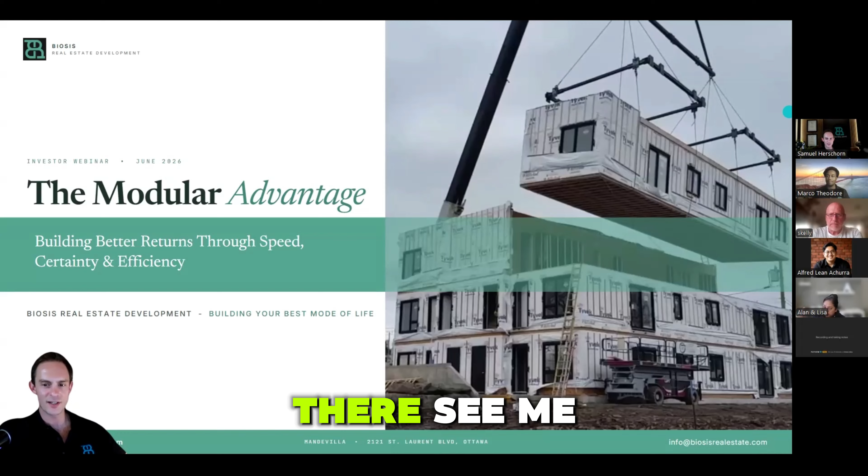Okay, well thanks everybody for joining once again. We've got an exciting topic. Marco, what are we going to be discussing today?

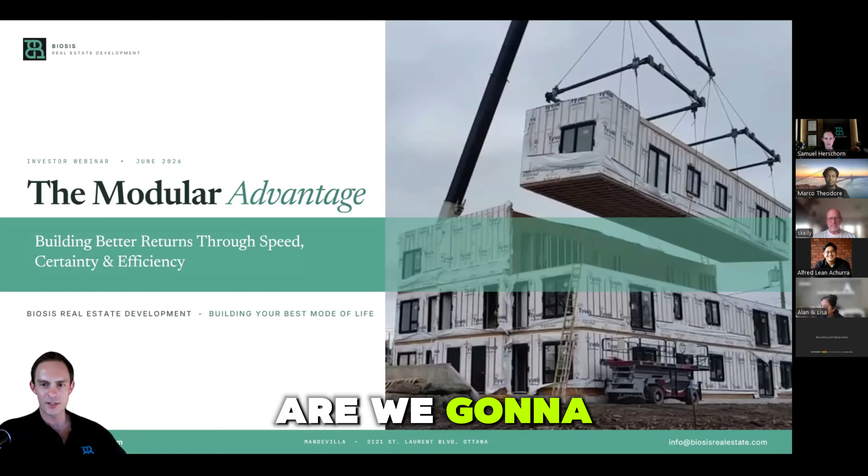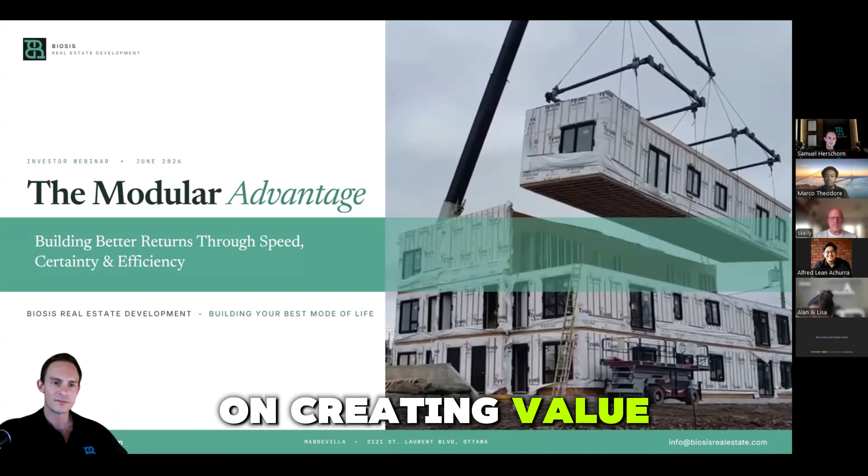Today we are going to be talking about the modular advantage. At Biosis Development, our focus is on creating value by enhancing speed, ensuring certainty, and maximizing efficiency in every project we undertake. This approach not only builds better returns but also aligns with our commitment to improving the lives of our community. What sets us apart is our dedication to the modular construction model - we can deliver projects faster with greater precision, which translates to increased investor confidence and satisfaction, and means our vision is not just to build structures, but the best possible mode of life for our community.

Beautifully said. For those of you who are new here, welcome, and thank you for joining us as we explore how our innovative methods lead to superior real estate development.

Now a quick note before we start: everything you see tonight is information only, it's not an offer, and the projected returns you see are not guaranteed. Real estate development is speculative, and you should always consider that you could be losing your investment - consider the risk involved. Before making any investment decision, please consult with your own lawyers, accountant, and financial advisor, as we are not here to replace them. Yeah, it's so important.

What we're going to be talking about today is based on our best guess and our projections. Ultimately, everybody needs to be doing their own due diligence and consulting with their professionals.

So what's on the agenda today, Marco? A lot of fun stuff. We're going to be looking at the economics behind real estate development in Ontario as they are changing. We'll look at a unique approach, the big picture, the modular advantage, the fundamentals and how they still matter to this day, our business plan with Biosis, and we'll dive into some of the numbers and how you can get involved.

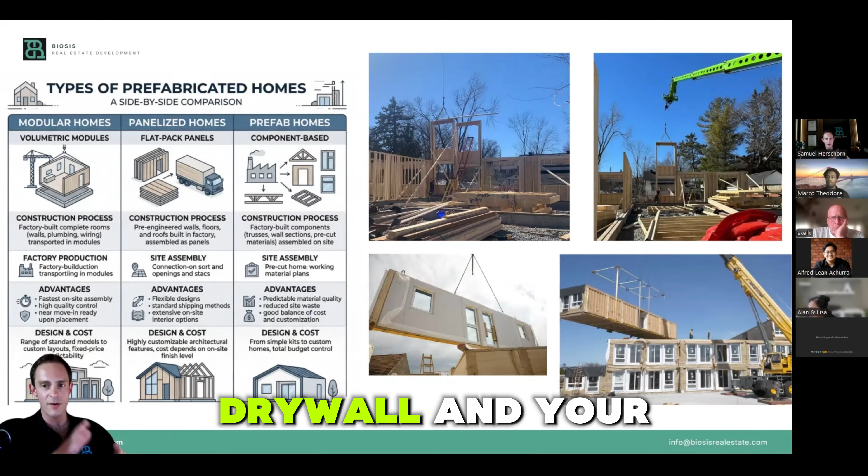In our industry, there are generally 3 different types of modular construction. We have a component-based system, where you're building full fitted-out components of a building. You can see an example here - this is an exterior wall, but it's got the framing, insulation, vapor barrier, drywall, and windows and doors already installed, and that gets craned into place. It's kind of like getting your Lego pre-assembled out of the box, but you then click it together.

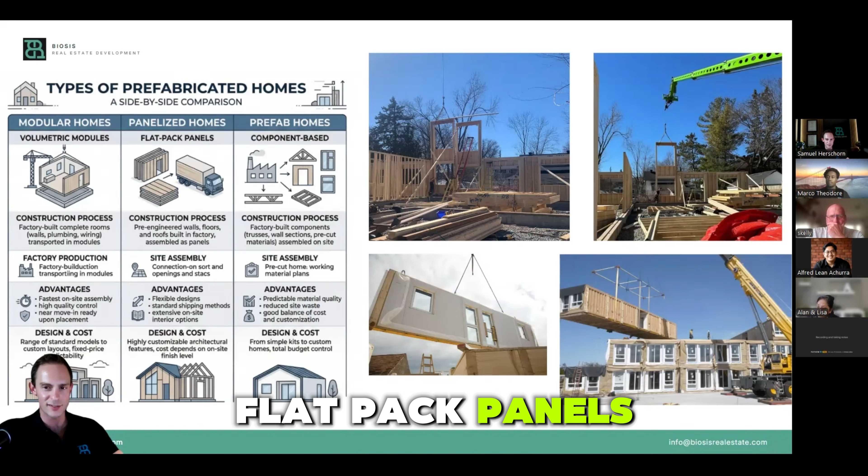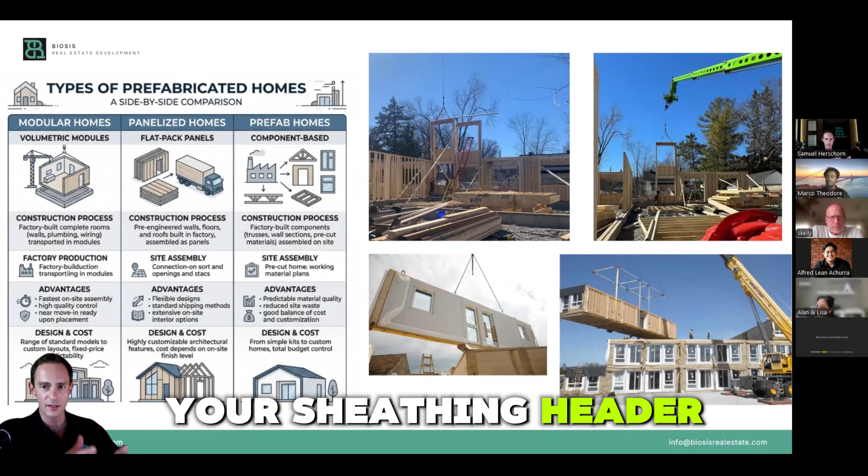Then you have your flat pack panels - say that 10 times fast. This is mainly framing, so you've got your studs, sheathing, header plates, bottom sill plates, all assembled in a factory. Your floors, floor decking, and potentially your roof framing would also be assembled in a factory. It's really just the framing components, shipped on a truck. You can see this is actually taken from one of our job sites - these full panels are literally craned into place, and two guys line it up and fasten it with nail guns.

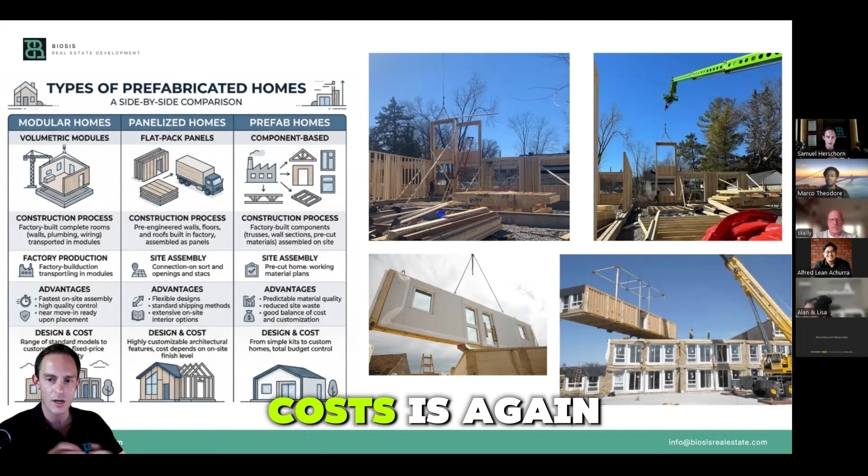Those are great. They're really well suited to sites that are oddly shaped, or have some logistical constraints, but are still relatively open. You can still have staging, and as you can see here, a lot of material is kept on site while they work. What you'll see with these methods is about 17% time savings on your projects. Costs are relatively the same. You might get some economies of scale through framing material, but generally you can cut down on labor because you only need two guys and a lift truck on site.

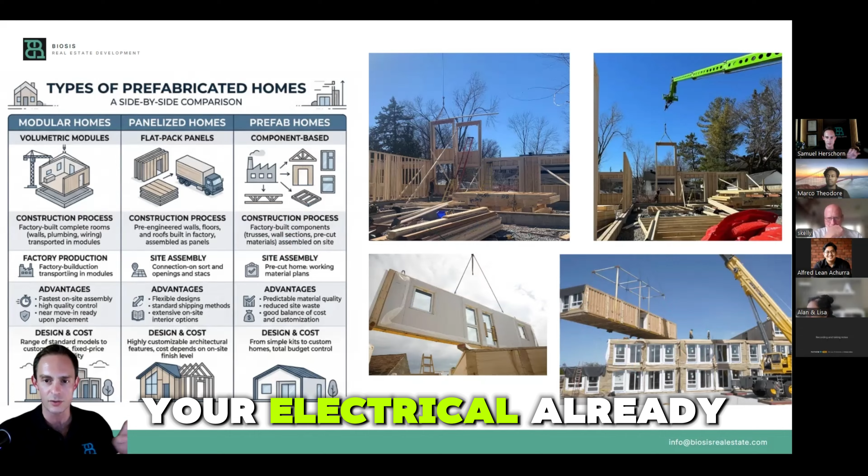So they're great systems, but there's one step further we decided we want to go, and this is fully volumetric construction. When we say volumetric, we're talking about the entire unit—an entire 1 or 2 bedroom or studio unit built in a factory with all the finishings, cabinetry, sinks, plumbing, electrical already roughed in, doors, windows, countertops already installed. And that gets loaded onto a flatbed truck and shipped to site.

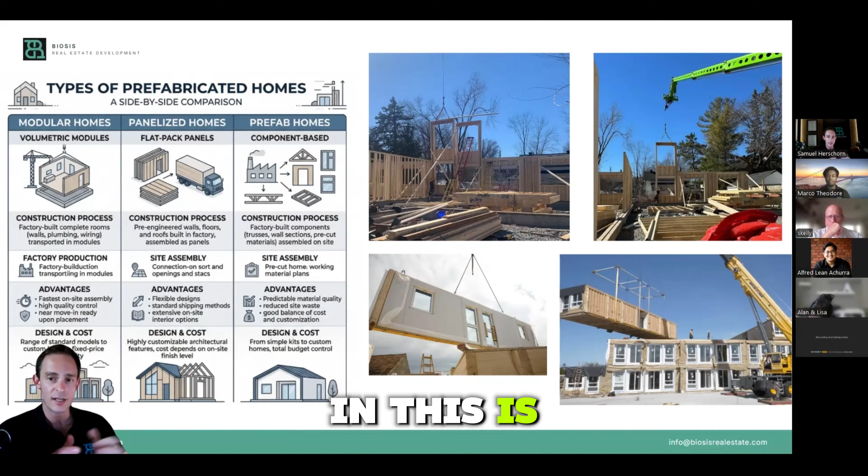And then the crane, as you can see, brings it in and connects them. You're basically stacking blocks. And the reason we're so interested in this is the huge benefit to the time saved on site and the logistics around it, which is what I'm going to cover next.

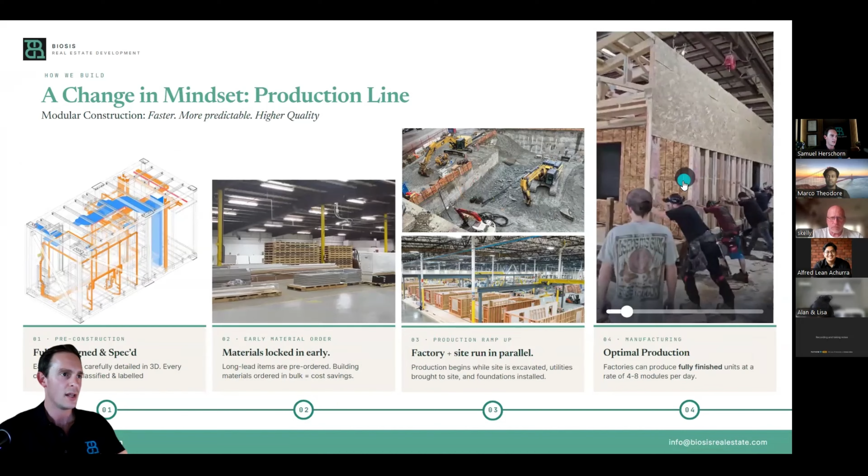Oh, whoops, that's loud. I'm going to see if I can pause that. All right, I'll just hold this down while we talk.

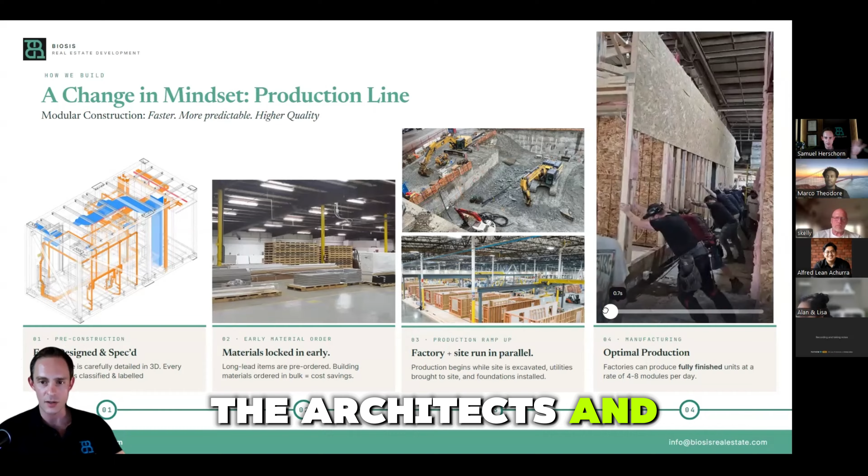So how does the modular system work? We, as the architects and all the consultant team, design the building according to the modular specifications of the manufacturer. That's a collaborative process. We do it using 3D software, and we work with the manufacturer from day one to design the building and all of the components that go into it.

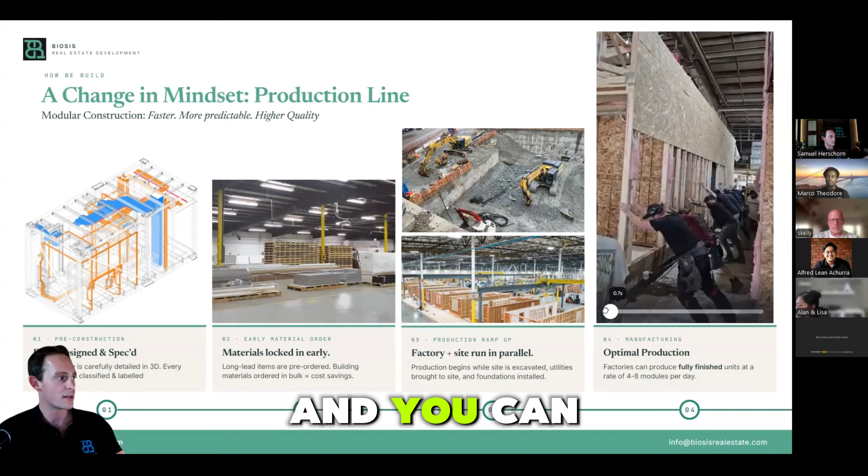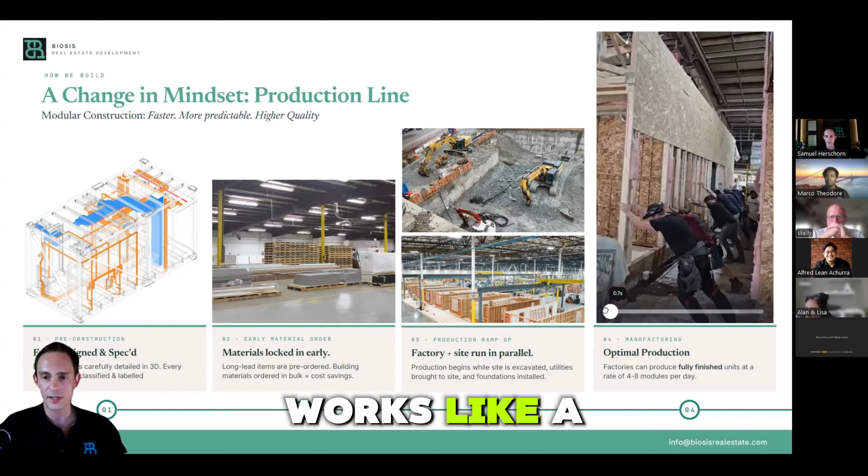You can see on the far left-hand side, step number 1: fully designed and spec'd. They have proprietary software for clash detection, and more specifically, to itemize every single component of the building. Once it's been modeled in 3 dimensions, all of the components get sent out for ordering. The material is pre-ordered, brought to the factory, and put into production. This works like a manufacturing line, like assembling a fridge on a production line. It's highly efficient. Your trades are pre-booked, and there's a system to it.

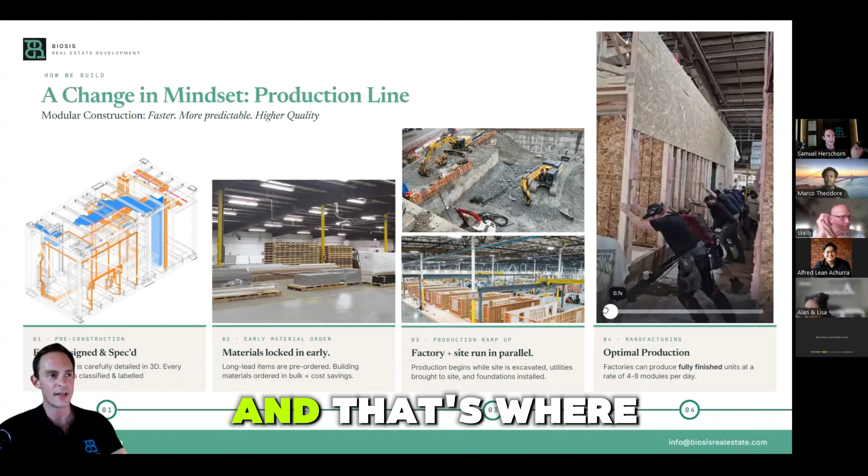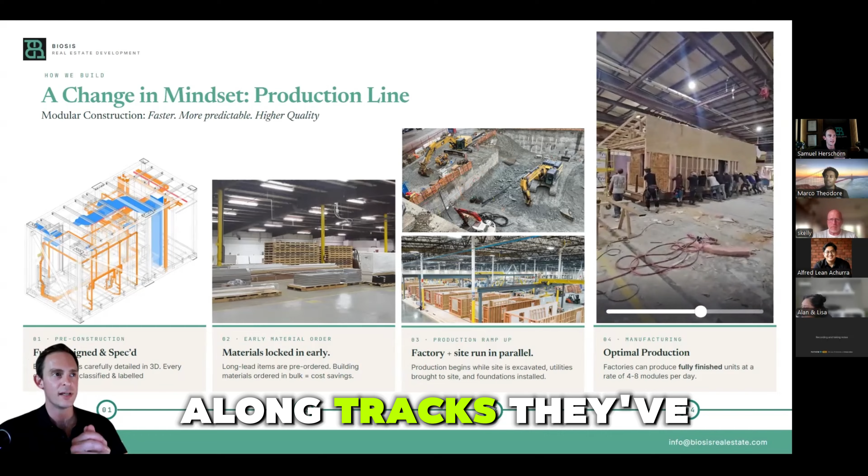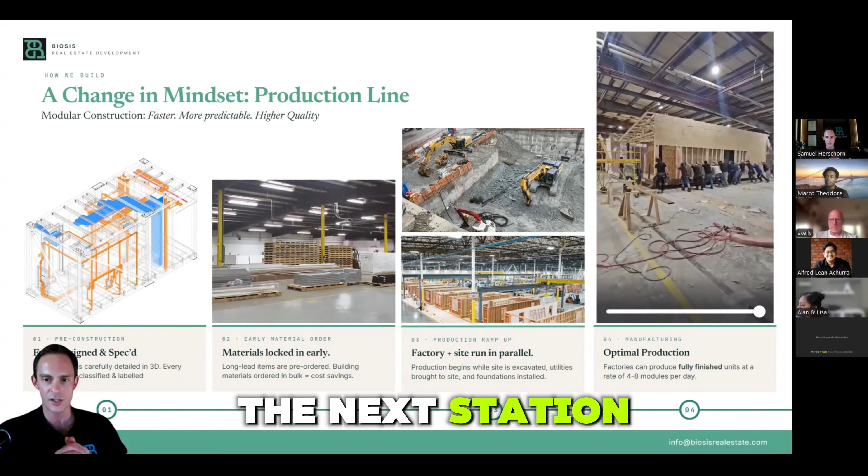And that's where this video comes into play. You can see here, this is a modular unit moving from one station to the next along tracks. They've already done all the framing, installed some insulation, and you can see the interior drywall done and the exterior sheathing. Now they're moving over to the next station and bringing up the module behind it for that installation process.

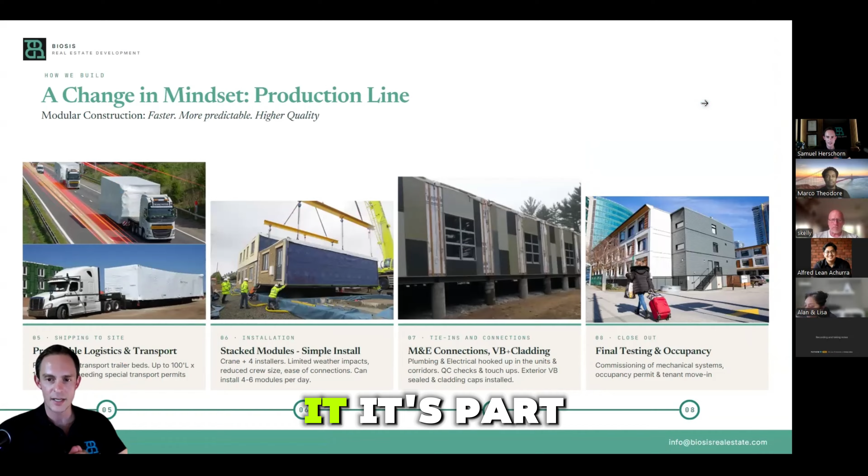Once the module is built, it's part of a larger system. But first they have to wrap it, and it's typically stored in a storage yard until the foundations and all the site work is done on site.

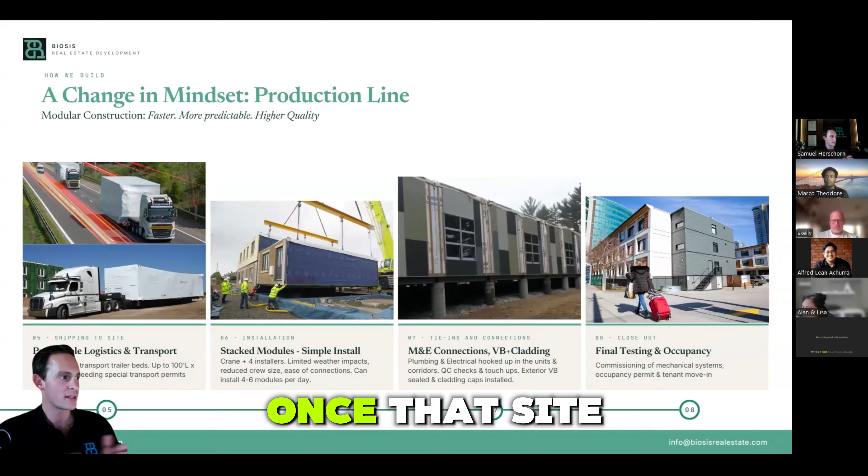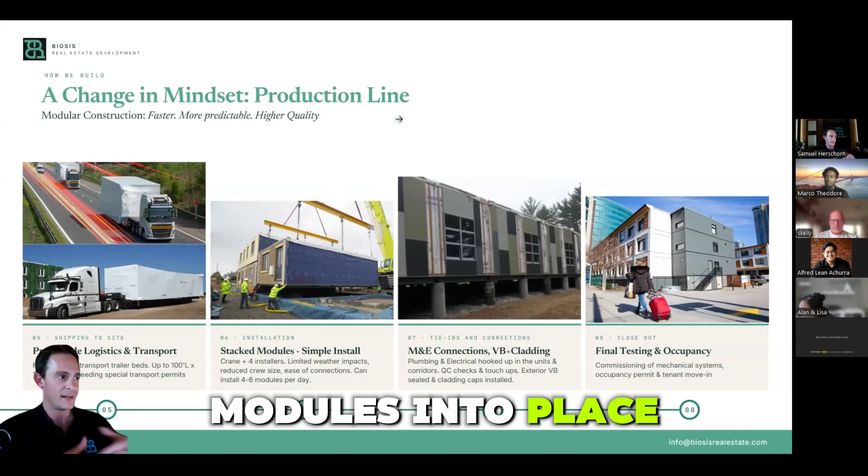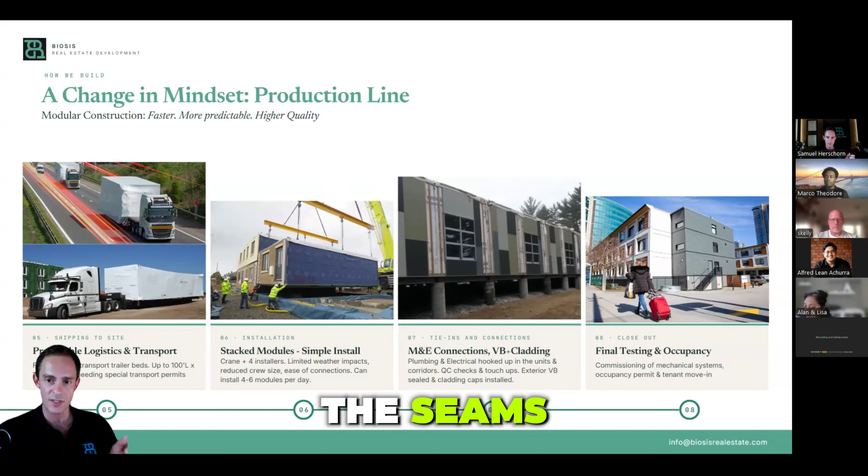Once that site work is in, they will ship it to the site. Again, you have a much larger crane truck, but still a crane truck and a couple guys guiding these modules into place. They will lay it down on the foundation, usually over a crawl space underneath, so that they can connect the plumbing and utilities. Then they will fill in the seams, making sure the modules are airtight, all the structures aligning, and the walls lining up with the other modules below.

And these modules get installed very quickly. Once they're installed, you have your final finishing, your punch list, your review, and your final testing and commissioning of all your services. Then the inspector signs off and you're good to start occupying.

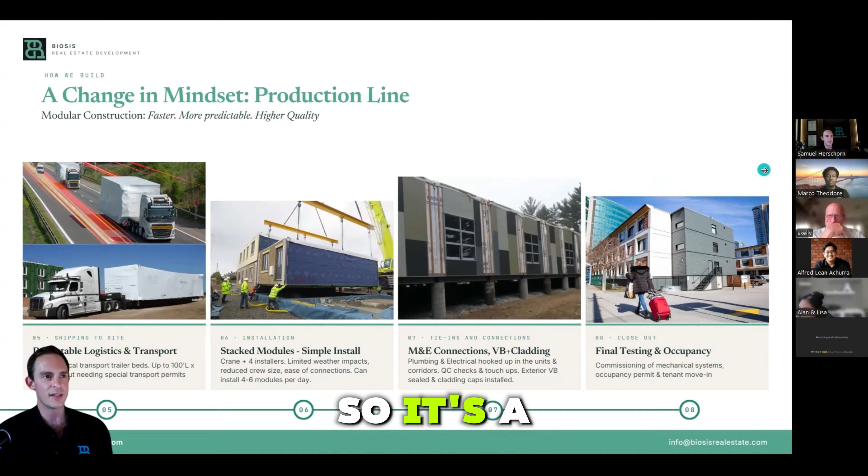Your module assembly is also very quick to install. So while the site prep and foundations are the same regardless, your framing, envelope, and all the interior finishings take a lot longer on site than they do in the factory. So you are saving up to 50% time on a project. That just adds to your bottom line in terms of profit. You're faster to do an equity pullout, faster to refi, and faster to cash flow and actually see that building come to life.

So there are some other major advantages to modular. It operates on a fixed price model. So when the manufacturer gives you the proposal and the cost to build, that's the cost it's going to be. It doesn't fluctuate very much.

Now, there are some instances where you might encounter a pipe when you do your excavation that needs to be moved. There are some small change orders that come into effect. There are also issues if you don't properly plan the modular process, like not having your foundations properly set according to the drawings. That can cause issues.

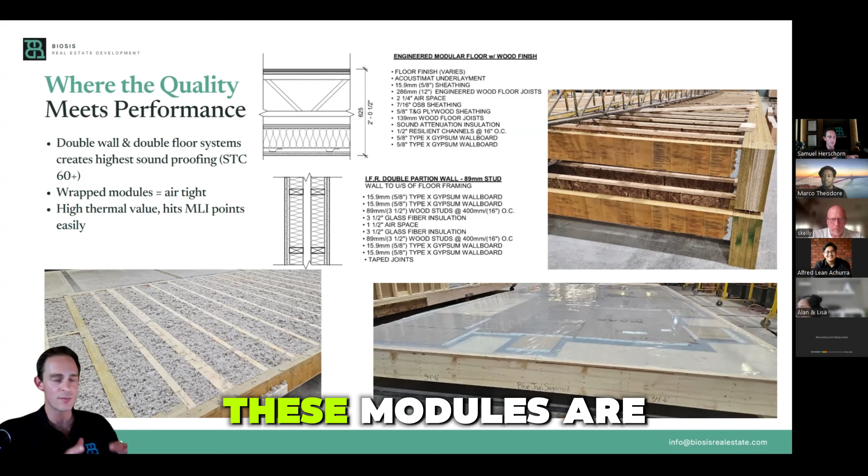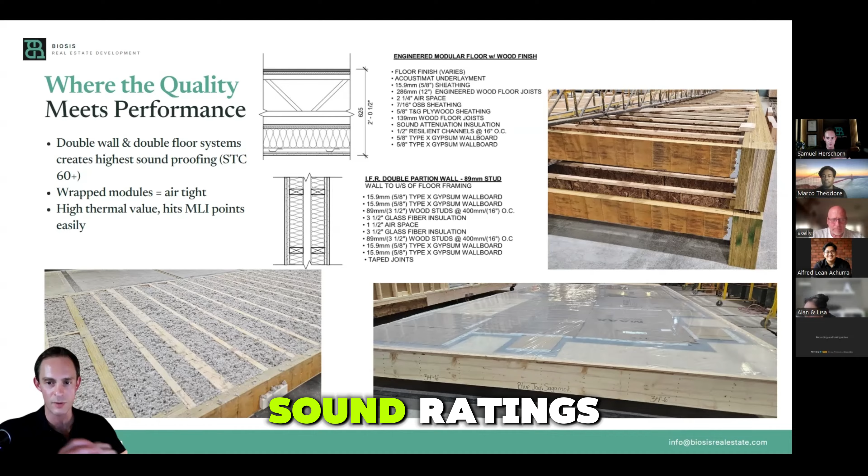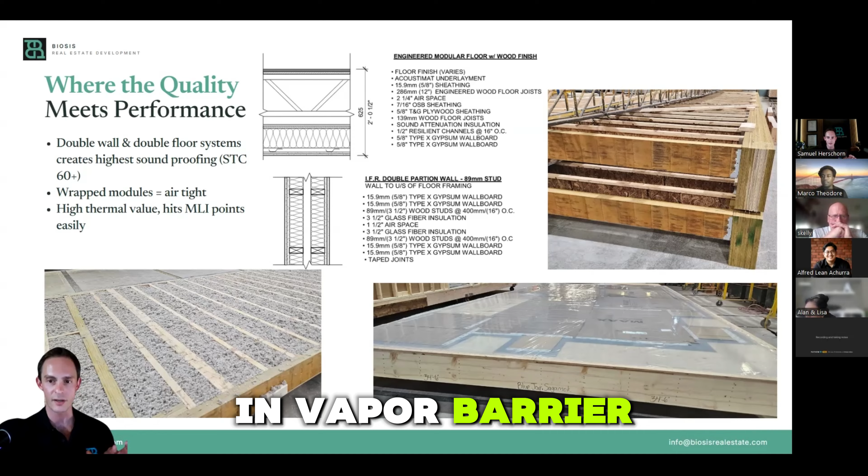Well, the way these modules are built, it naturally creates a double wall, double floor system, very soundproof. It's probably one of the highest sound ratings that you can get in wood frame construction without pouring a concrete topping. The other thing is because they're all wrapped in vapor barrier, essentially coming out of the storage yard, they're very airtight. They come pre-assembled with insulation as well, higher R value, so they're very, very thermally comfortable.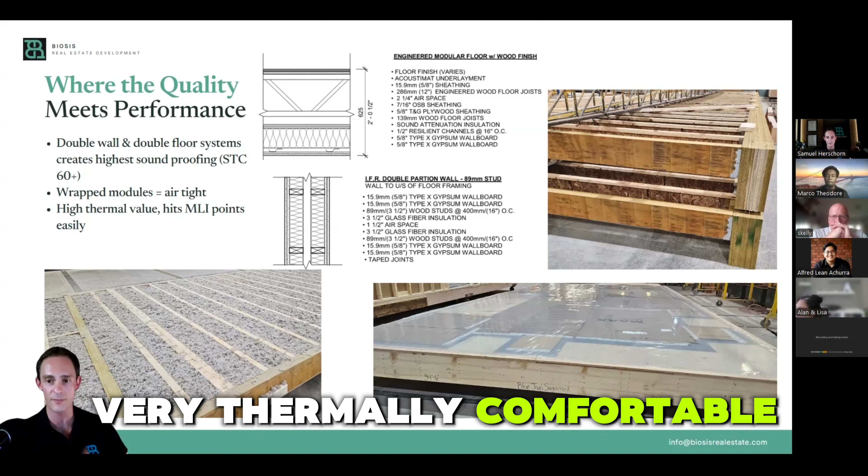That means you have to pair it with a good ventilation system, but they are top quality. Your energy costs are going to be much lower on this type of building than it will on a conventional building.

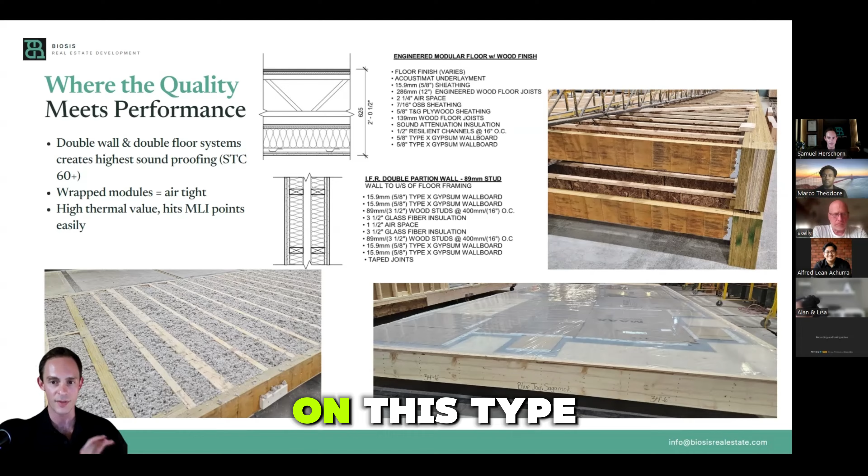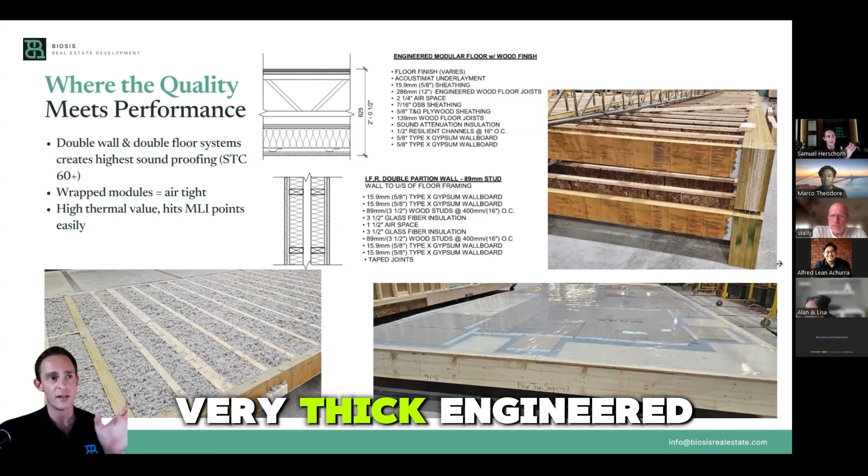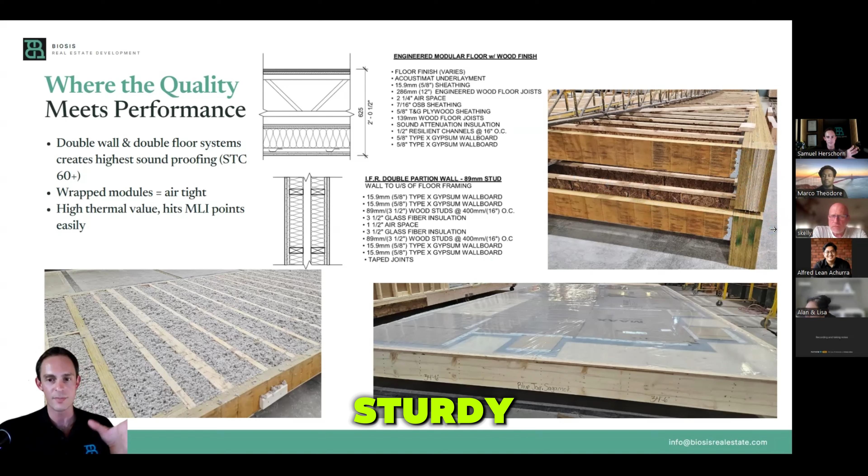And then structurally, you can also see how sturdy these things are built, right? This is a very thick engineered joist. I believe you've got an LVL with some I joists in between. They're very sturdy, and they need to be because you're stacking multiple on top of each other. But it means it's quite a rigid structure that's going to last.

So modular, it's a great system, but there are still things you got to watch out for. I'm going to pass this one off to Marco because he's very familiar with some of the mistakes that investors and developers still need to take into account.

Right, absolutely. Now, we see while modular construction offers many benefits, it's important to recognize that it isn't a one size fits all solution. All of your underwriting, the fundamentals are essential and are a start of choosing the right deal. Market analysis such as location, your population, economic growth, public transportation, and median income still come into play.

There's still things such as managing your approval risk, which is a vital step when dealing with modular approval. It often takes a little bit longer than anticipated, so you always have to plan for the long term. And you have to consider factors like highest and best use, public support, environmental conditions, and such as your soil and groundwater.

Now, keep in mind, many financial institutions are unfamiliar with financing modular projects, so conservative underwriting is very, very necessary. And working with a lender that understands that it's not conventional construction.

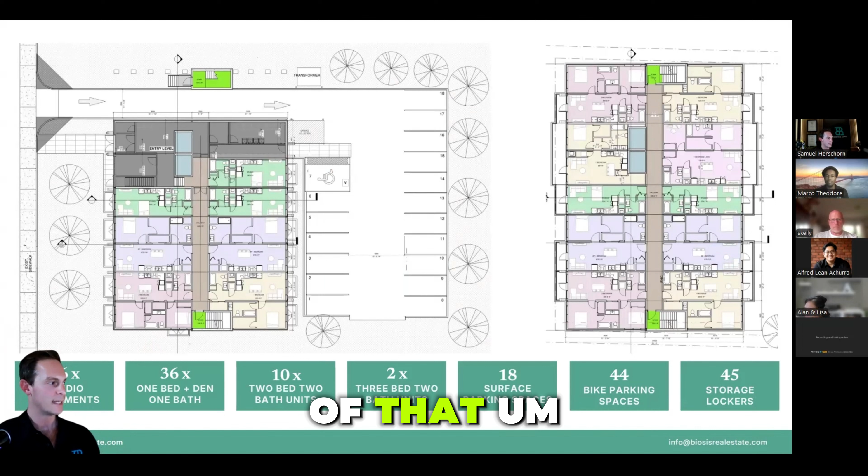Total anticipated project cost is around 20 million, so there's potentially $5 million in equity at the end of that. This will be composed of a number of studios, one-bed-and-dens, two-bedrooms, and a couple of three-bedroom units. We've got 18 surface parking spaces, no underground.

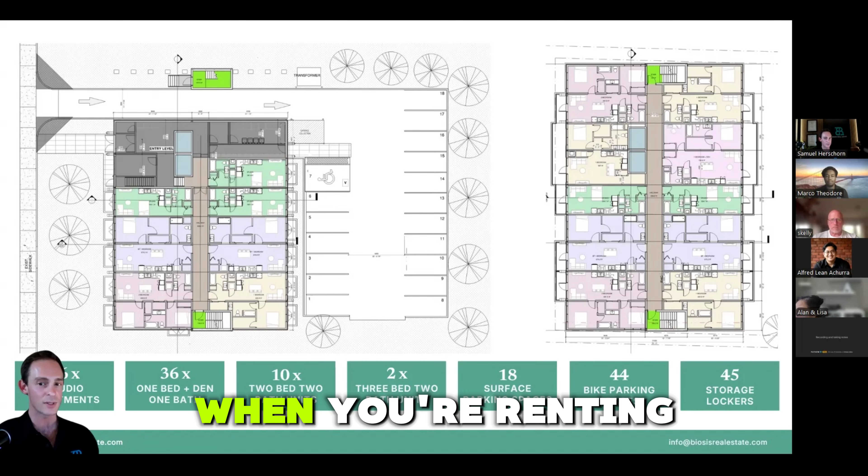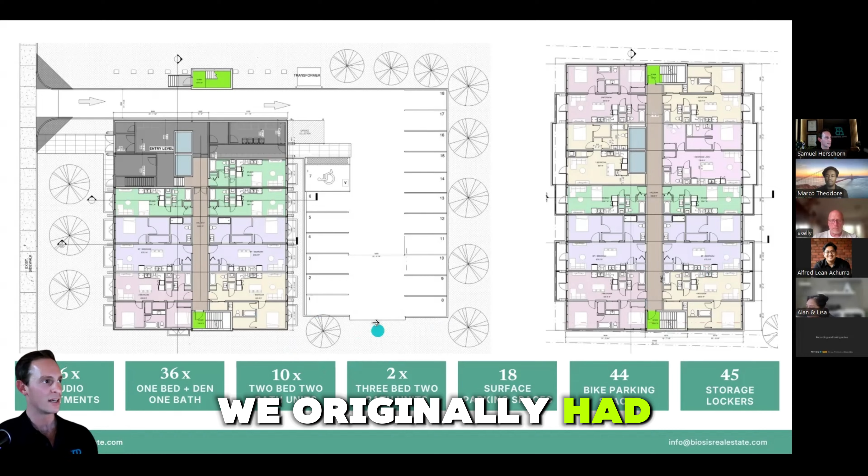Underground parking tends to kill the pro forma—it's very expensive to build and you're at break-even at best when renting underground parking. For a project of this size, surface parking makes sense. City of Ottawa has removed minimum parking requirements and actually set maximum parking requirements. We've gone back and forth with them, and they've forced us to bring the parking lot in a little bit—we originally had an extra 4 spots on either side.

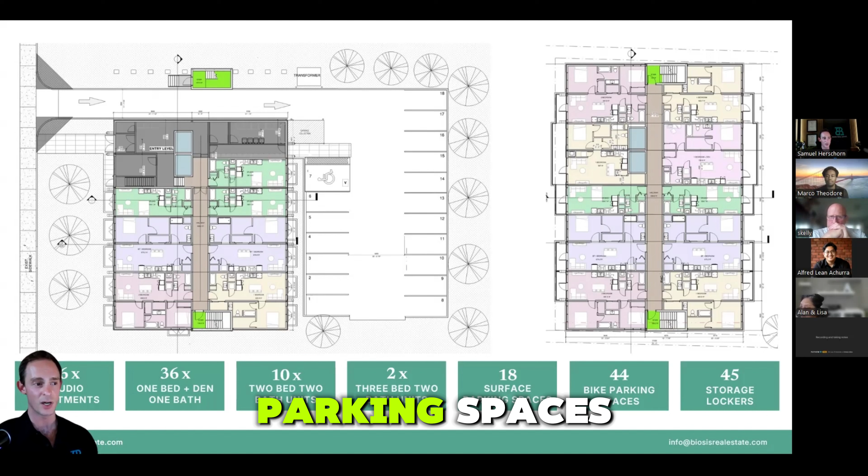But 18 spots is actually pretty decent for a rental community. We're going to be introducing rideshare programs and will have EV charging to make the numbers work there. Inside the building we've got 45 storage lockers and 44 bike parking spaces, which fits in really well with what the city's looking for—they like that bicycle-pedestrian oriented design.

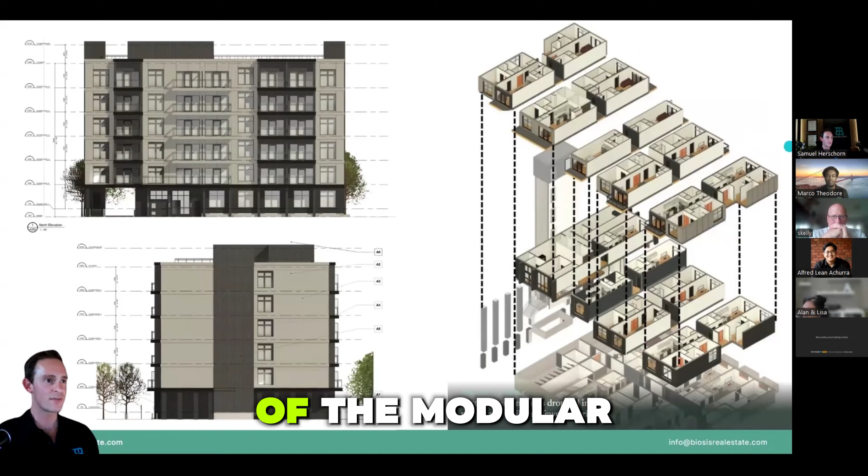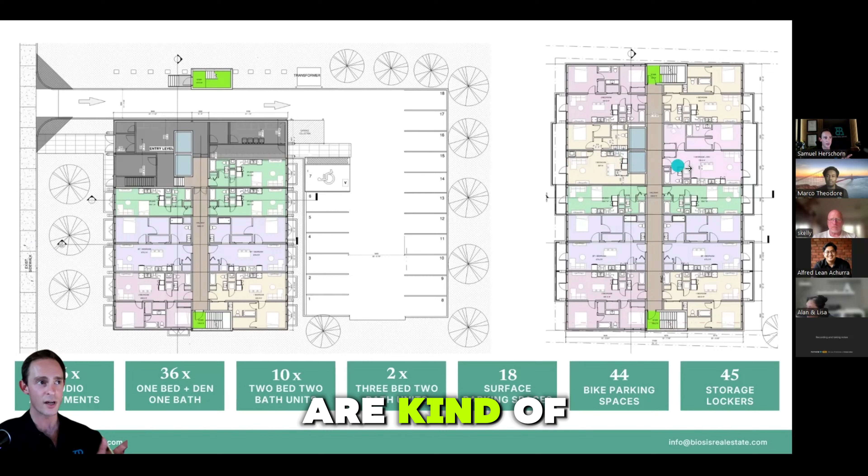In terms of the modular design, you can see it illustrated in 3D. On the last slide, all the units are lining up—all the walls are in line, even the elevators are within this framework, which is about a 14-foot wide module. You can see how it's coming together to form the building.

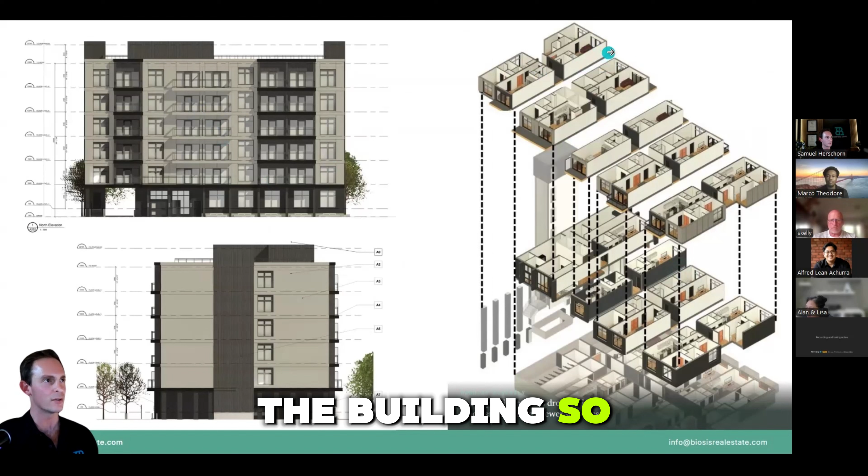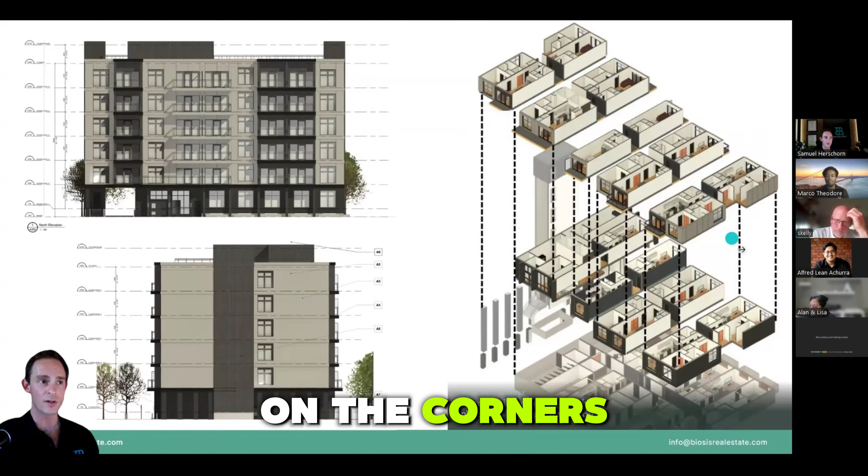So you've got a living space here that's stacked back to back with the corridor, and right next to it we'll have our bedroom, bathroom, closet combination—those are 2 modules that get paired. Then you've got a studio module, which is basically the living module reorganized to add a Murphy bed system. On the corners, this is where you've got your 2-bedroom and 3-bedroom unit configurations.